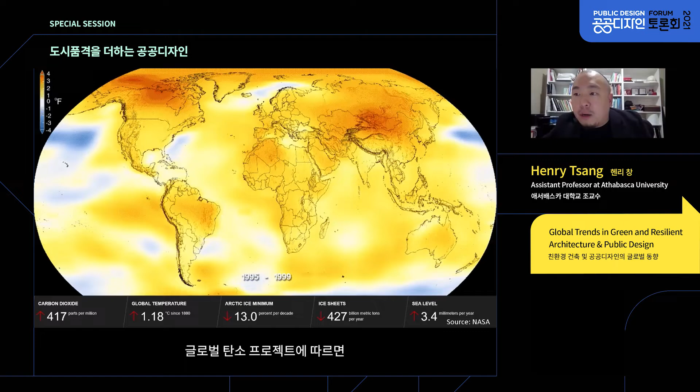The Global Carbon Project states that cities account for more than 70% of our CO2 emissions. Emissions from cities vary greatly depending on land use, energy consumption, and a variety of socioeconomic and geographical factors. Three points to note here. Firstly, it is agreed that there are three main contributing sectors to CO2 emissions: buildings, commercial and residential; industry; and transportation. Secondly, given that world population is still growing and more people are moving to live in cities, urbanization will continue into the foreseeable future. Thirdly, this process will increase emissions unless cities take action to reduce emissions through architectural and urban planning, new technologies, and behavioral changes.

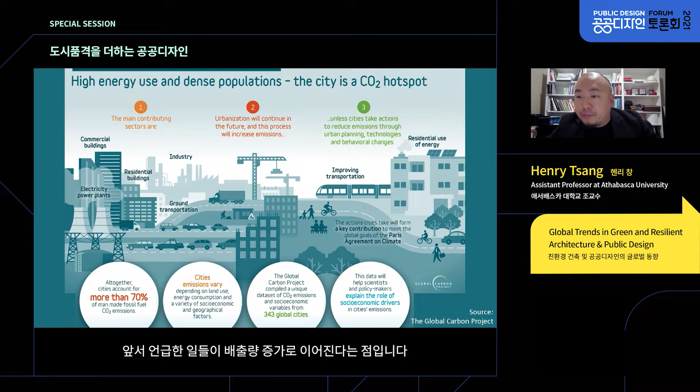As previously mentioned, the building industry and transportation sectors contribute to emissions of CO2. Most importantly, buildings, construction, and operation account for approximately 40% of global energy use and energy-related greenhouse gas emissions. In Canada, this accounts for 45%, and in Korea, it is even higher, around 56%. As a result, a move towards greener, more sustainable, and regenerative design will have a huge positive impact in the reduction of greenhouse gases and slow down climate change.

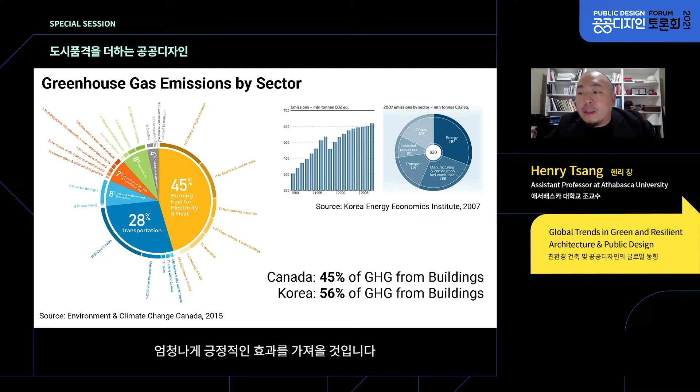A green building is one that consumes less energy through the efficient use of resources. They possess a smaller carbon footprint than its energy-hungry predecessors. However, designing green buildings is only one step in the right direction, but a necessary one.

In designing a green building, these are the categories included in design frameworks, which include energy and atmosphere, water efficiency, sustainable sites, location and linkages, innovation and design, awareness and education, indoor environmental quality, and materials and resources.

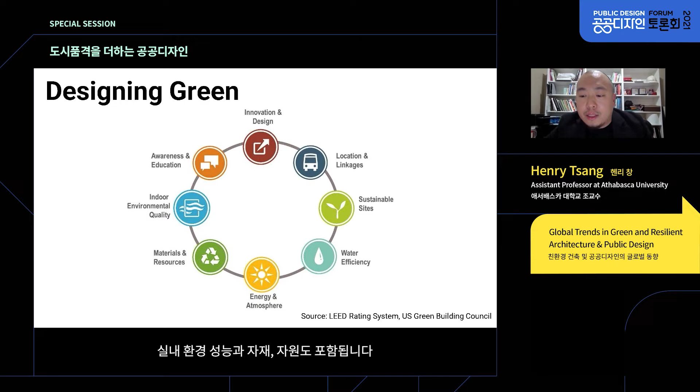"An endless number of green buildings doesn't make a sustainable city," said the Danish architect Jan Gehl. In fact, just designing green buildings is not enough to be sustainable. We need to aim for net zero carbon and beyond, which can be achieved through the careful orchestration of the holistic systems of the city.

World targets to meet net zero are scheduled for 2030, during which all new buildings must operate at net zero carbon, and in 2050, during which 100% of buildings must operate at net zero carbon. Four key principles are proposed by the World Green Building Council to achieve this target for buildings: one, to measure and disclose carbon; two, to reduce energy demand; three, generate balance from renewables; and four, to improve verification and rigor.

This is the first project I would like to introduce to you, one of my recent designs for the Calgary Japanese Community Center in Canada. The design takes into account the local residential context in a suburban neighborhood. The massing of the building recognizes the scale of the surrounding buildings. The shape and materiality of the building is studied to reflect the local vernacular architecture, but also as a community center for an ethnic Asian group. There was also deep discussion on cultural understanding prior to the design to properly reflect the cultural identity of the building. As a design, it introduces a central courtyard in the middle that is accessible and open to the public. This is a space that contributes positively to the neighborhood as a garden and place of respite. It is vegetated by indigenous plants, acting like the lungs of the building by absorbing CO2 and providing fresh air.

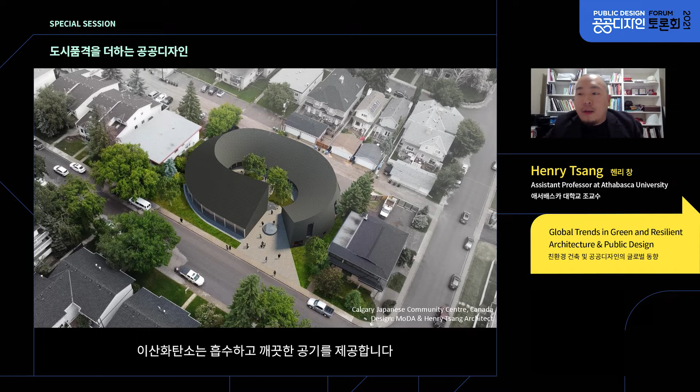The green design strategies are complemented by passive and active design techniques here. Passive solar design approaches optimizing the sun dictate the geometry of the roof. The roof twists according to the sun path. At the ground level, it is open for views inside and outside, but also allowing natural light to penetrate deeply into the rooms to optimize light and heat. The building material is mass timber, so it greatly reduces the embodied carbon footprint of the structure. And an earth tube system provides the building with naturally ventilated air through underground tubes.

Water is also retained for irrigation and gray water. Active design approaches include the introduction of solar PV panels, as well as sensors that control the turning on and off of the lights.

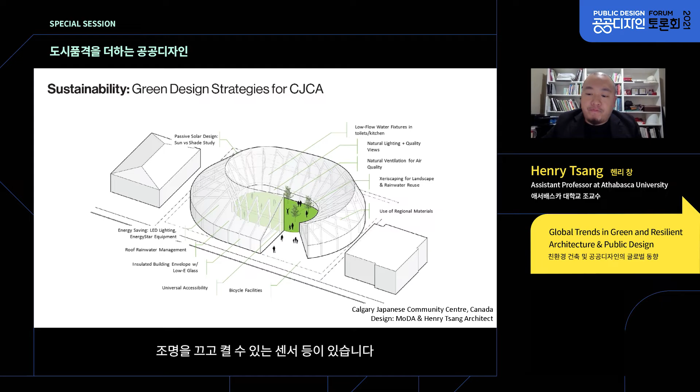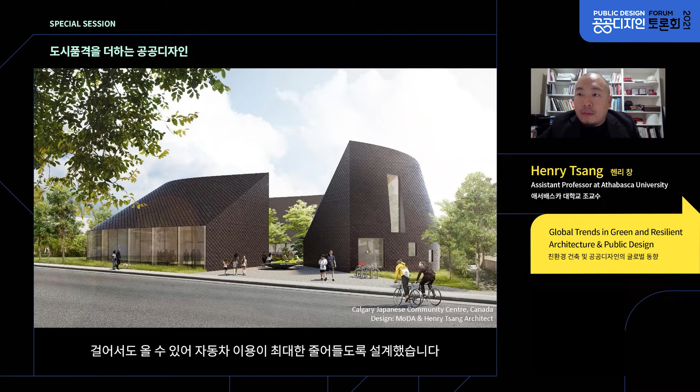From the entrance, the building is inviting, open, and well lit. This increases safety when visibility is well ensured. The building is also designed to be well equipped for bicycle users with bike racks, but also accessible via public transportation and walking, while discouraging the use of cars as much as possible. The building is also designed to be as flat as possible so that it is accessible to wheelchair users and seniors. Canada has a large aging population, therefore barrier-free universal design will also contribute to providing dignity and equitable accessibility in public buildings and spaces.

Moreover, consideration of views and biophilic design greatly enhances health and well-being for people using the building. Particularly with the COVID-19 pandemic, we are spending over 90% of our time indoors. Therefore, physical and mental health in buildings are serious issues to be considered.

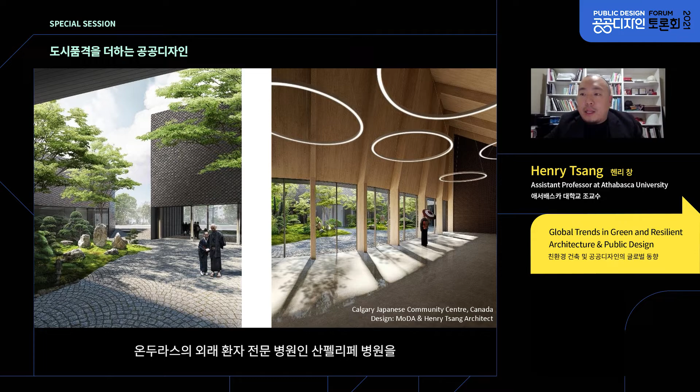Similarly, this is my design for an outpatient clinic for the San Felipe Hospital in Honduras, using the same strategies of integrating nature, providing openness, visibility, understanding and preserving culture, and ultimately focusing on a human-centered design.

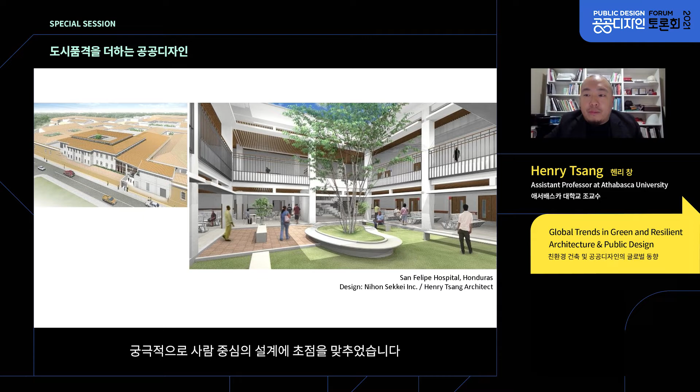As a result of global warming, occurrences of natural disasters has more than tripled in the last 30 years. Over 800 million people living in 570 coastal cities around the world would be negatively affected by rising temperatures and sea levels projected at 30 centimeters by 2050. This is the case for the Korean Peninsula, where coastal cities such as Busan and Jeju are already experiencing an aggravating number of typhoons and floods over the past several years.

As a strategy, designing for disaster resilience is to respond to 4 phases of the disaster: number 1, the response; number 2, recovery; number 3, preparation; and number 4, mitigation.

In 2011, I designed the University of Indonesia's Health Science Campus. This project was a public project in support of the nation following the devastating Sumatra tsunami in 2004. The project was for a university teaching facility as well as a hospital. This project was particular as it was the first of its kind in the country designed to be a top-notch green building, as well as a resilient building to natural disasters. The design team from Nihon Sekkei Architects collaborated closely with the university and health ministry for over 2 years to develop the scheme.

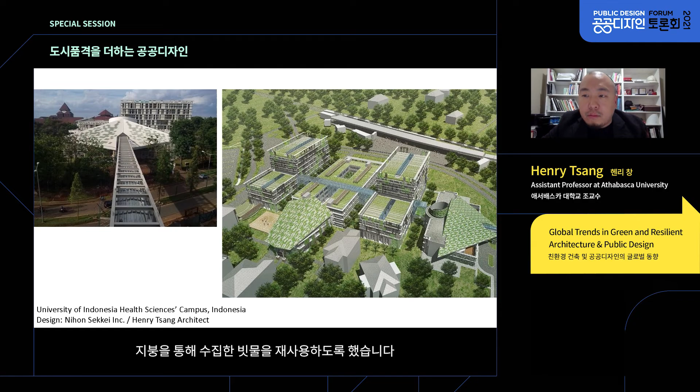Culturally, the project emulates the geometry of the existing traditional campus buildings while bringing a modern interpretation to the architectural style. For resilience, the structure of the building utilizes base isolation techniques that allow the building to float on flexible columns so that the building can be shaken by earthquakes but return to its original position. Off-the-grid power generators also allow the building to continue to function in case of a power failure.

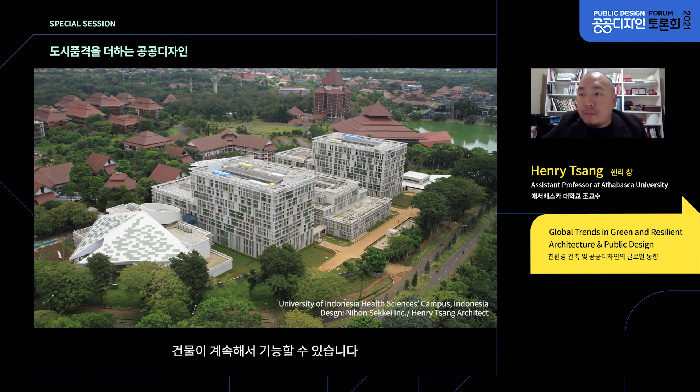I lived in South Korea between 2015 and 2019 as a professor at Keimyung University. At the time, I was involved as an advisor and jury member to 2 major international design competitions in Korea.

The first project is the Gangnam Intermodal Transit Center project, and the winning proposal was submitted by a French architect by the name of Dominique Perrault Architecture. This is a quiet, subdued proposal that tried to balance the busyness of the district.

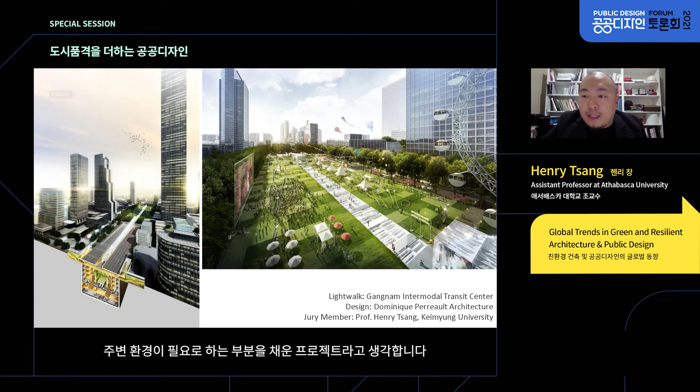Most of the building is underground, making place for a large outdoor central park on the ground level. This provides an interesting human-centered public space rather than giving way to the cars. The functions of the building include a highly complex transit terminal for buses, trains, and cars. Therefore, I think this project, which proposed a green, tranquil, and iconic design, provided what is needed for this context.

The second project I was involved in is the regeneration of the Tongyeong Dockyard project. This project's aim was for the revitalization of an abandoned shipbuilding dockyard. The winning proposal by Henn and POSCO A&C proposed an urban planning design that celebrates the culture and identity of the site as a dockyard.

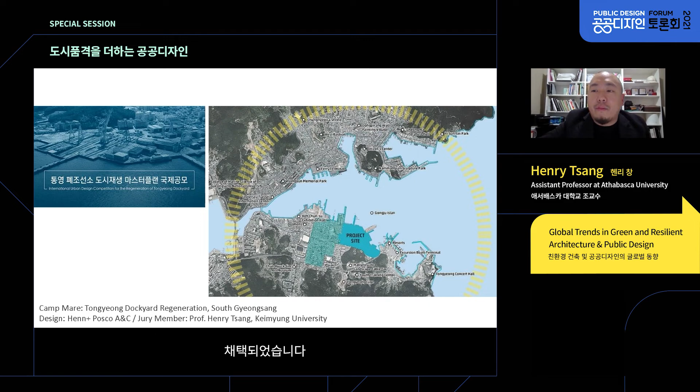Here you can see the architects reutilizing some of the abandoned cranes and warehouses, reimagining them into different functions such as a stage, a market, and a makerspace. This project also proposes a sensitive approach to culture, identity, as well as preservation of the site, which I believe was an appropriate design for this project.

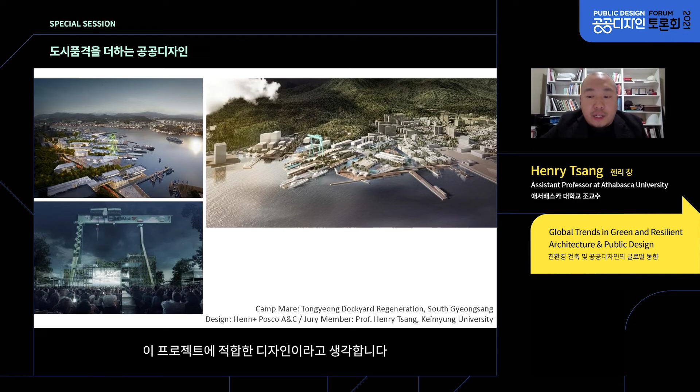So finally, I would like to summarize some of the main strategies in the design of green and resilient architecture and public design. Number one, to create harmony with the natural and built context. For a green building to be sustainable, it needs to respond to the natural environment that surrounds it, such as the sun, the wind, and the climate, and optimize the use of natural elements through passive design. This needs to be complemented by active design and smart technology. It equally needs to respond to the built context, such as other buildings, infrastructure, roads, etc., in creating a synchronized system.

Number two, to preserve and embody local culture and identity. Every place has a local culture and identity, and a good design would seek to preserve and enhance this through discussion, understanding, and public engagement.

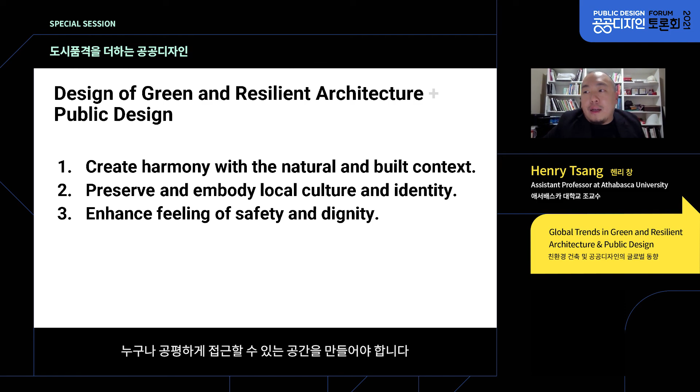Number three, enhance the feeling of safety and dignity. A good design should make one feel safe through well-lit and visible spaces. One should also feel dignified through the provision of privacy, as well as equitable treatment and access to spaces, such as with barrier-free universal design.

Number four, to promote health and well-being, buildings need to first do no harm by eliminating toxic materials, but moreover, contribute to the health and well-being of users with quality air and indoor environments.

Number five, to focus on people, human-centered design. Buildings need to design for people first, and the design should also respond to the human scale and the perceptions of space.